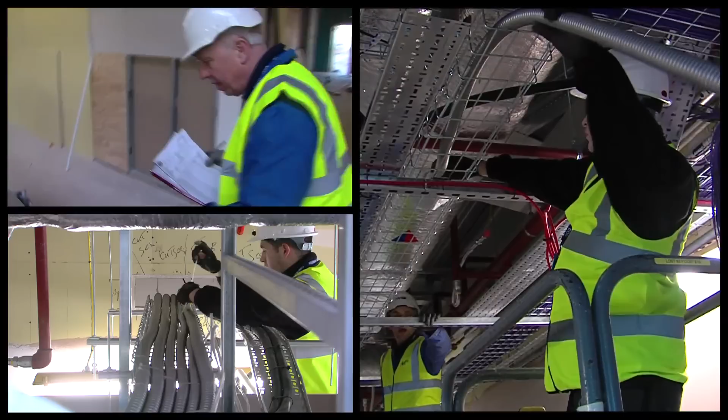All the systems that AWS are able to provide are from an off-the-shelf portfolio of existing technologies and products that have been applied in a way that's both innovative and cost-effective, but, best of all, easy to install.

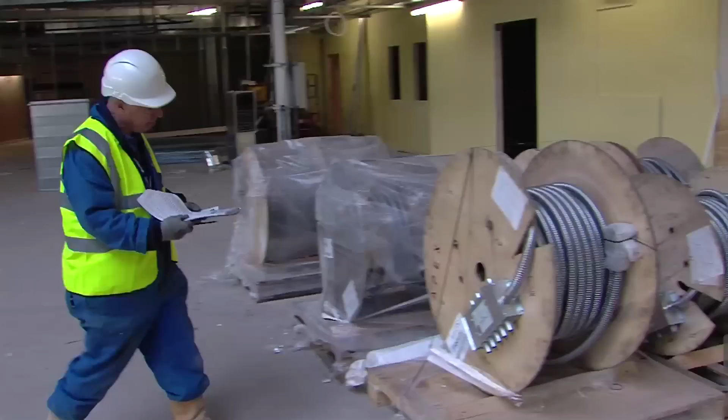It is good practice to manage a modular wiring install by program stage within individual zones. This ensures that all first fix materials are received on site together. Then second and third fix items should be delivered later, in line with the program.

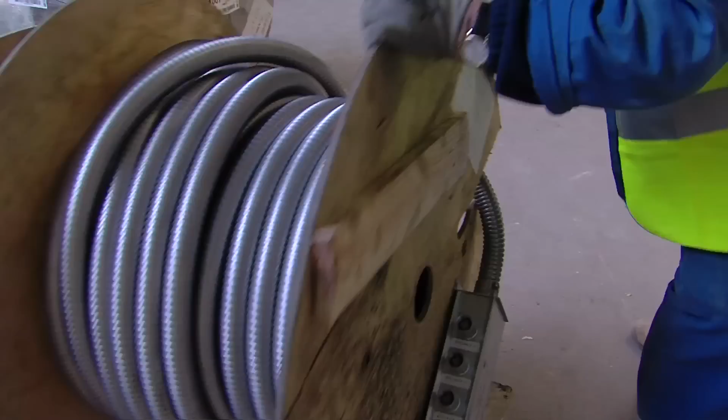Apex Wiring Solutions have standard lead times for standard products which are available on request. As some items are made to order, allowing for these lead times when requesting or ordering material will ensure the materials for the site are delivered on time.

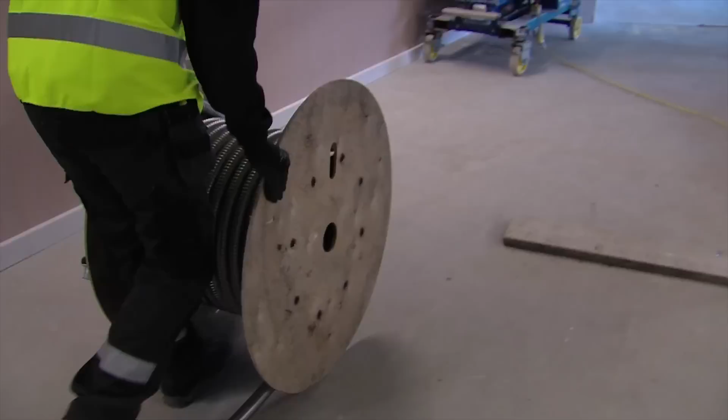All equipment should be inspected for any damage caused during shipping on arrival to site. It should also be checked against any installation schematics, which will define how the system plugs together. Good housekeeping is essential. Deliveries per zone should be segregated and delivered to the required location on site to stop materials from being mixed up.

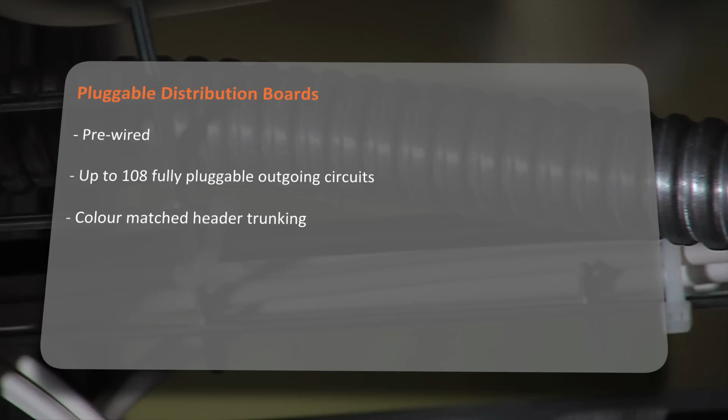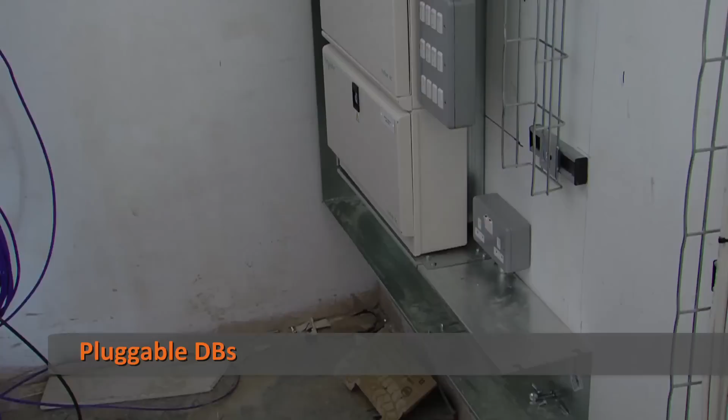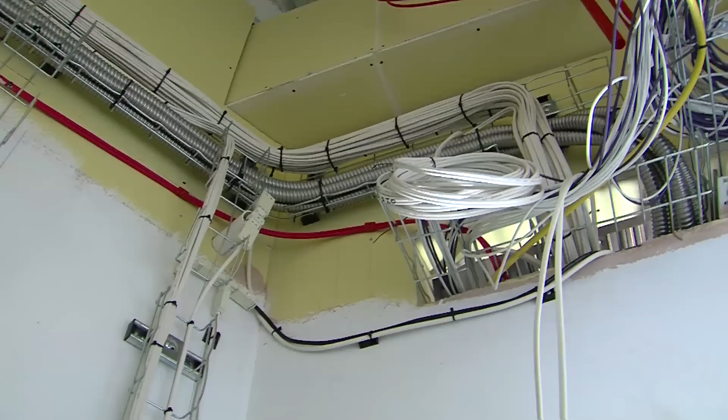A comprehensive range of pre-wired three-phase distribution boards, or DBs, are available. Each DB arrives on site with a set of female connectors wired into a header trunking mounted to the top of the DB, giving the pluggable outgoing circuits. Individual connectors are labeled and mechanically coded to prevent mismating of circuits.

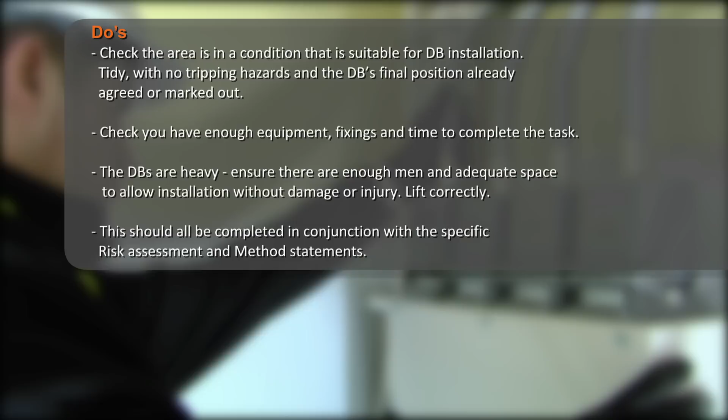DBs are supplied pre-mounted onto a unistrut frame as standard. This allows for simple installation in enclosed environments. Do's. Check the area is in a condition that is suitable for DB installation, tidy with no tripping hazards, and the DB's final position already agreed or marked out.

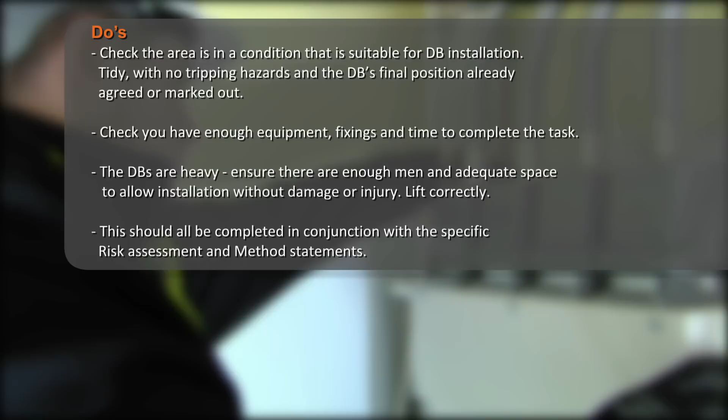Check you have enough equipment, fixings, and time to complete the task. The DBs are heavy. Ensure there are enough men and adequate space to allow installation without damage or injury. Lift correctly. This should all be completed in conjunction with the specific risk assessment and method statements.

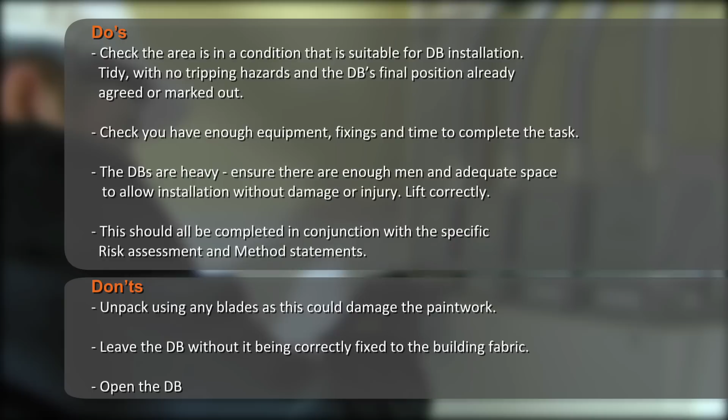Don'ts. Unpack using any blades, as this could damage the paintwork. Leave the DB without it being correctly fixed to the building fabric. Open the DB.

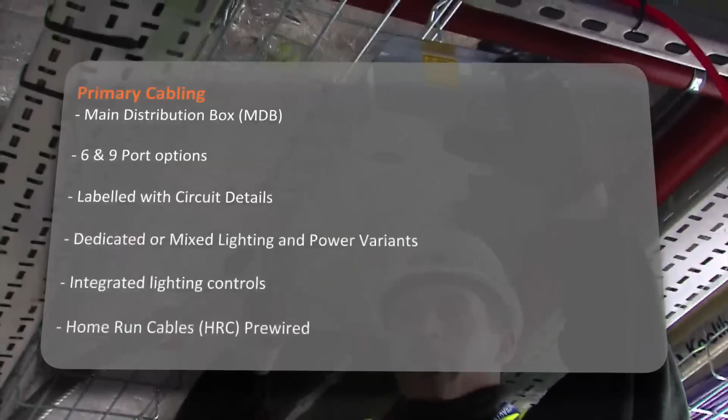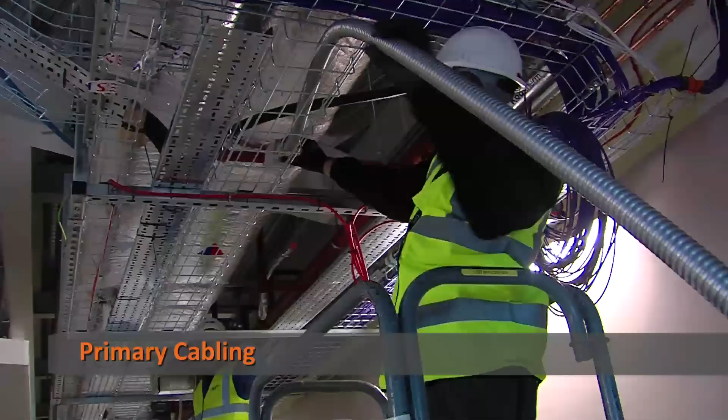Multi-circuit armoured cables, designated home run cables, run from the electrical distribution board to the main distribution box, or MDB. With up to 9 outgoing ports, the MDB can be configured to suit any mix of lighting and power circuit requirements.

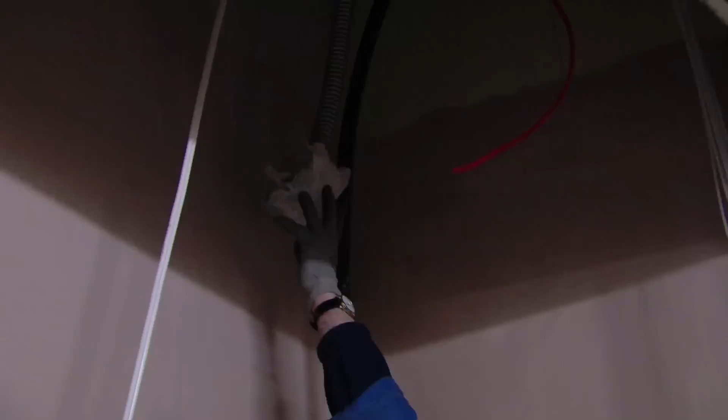Starting in the corridor with the MDB adjacent to the selected containment, decant enough of the home run from the male connector end to feed back through to the DB cupboard. As the DB is the fixed point in the installation, it is essential that this process is well coordinated.

Do's. Take some time to plan the order in which home runs are fed into the DB. Avoid as much as possible crossovers left to right and front to back. Check with the labelled MDB reference numbers and the DB chart or electrical drawing to ensure the correct home run is being used.

Dress the connector end from the top of the DB up the wall using a section of containment and metal tie wraps. Consider the bending radius when installing. Don'ts. Pull the home run using the connector or MDB.

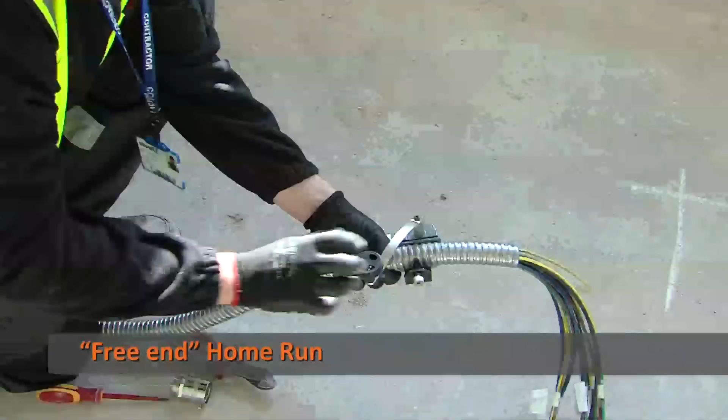Where MDBs are supplied with free-end home run cables, individual circuits are identified by means of core identification, whereby each set of live, earth and neutral insulated conductors are marked on the insulation accordingly, 1 to 6 for a 6-port MDB and 1 to 9 for a 9-port.

Do's. Remove the excess armour using a roto cutter in small sections, removing carefully so not to damage the conductors until the correct strip back is achieved. Take your time. Replacing an MDB is time-consuming if too much armouring is removed or the conductors are damaged. Don'ts. Remove any labelling on the conductors while trimming back the home run.

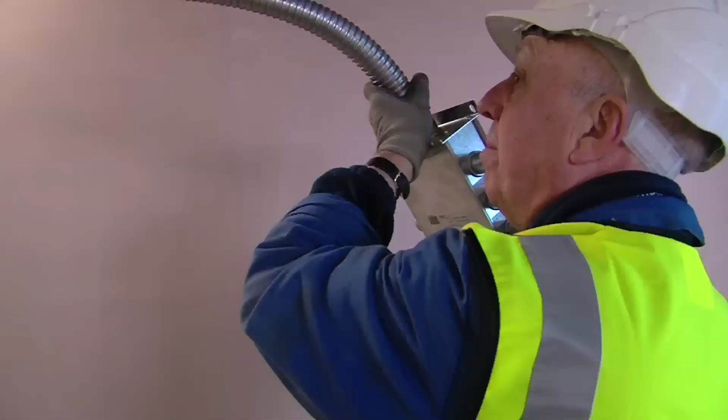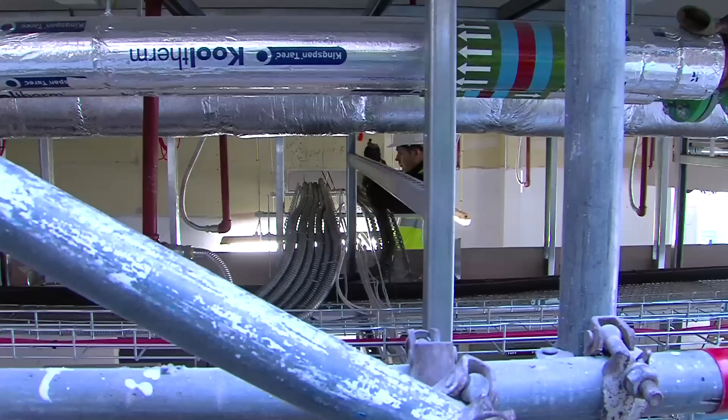Unroll the home run away from the DB using cable jacks, and if site space and working conditions allow, completely decant onto the floor. Then lift into the containment supplied, ensuring the MDB and home run is supported to reduce any strain. The home run should be cable tied every 2 meters to ensure there is no disruption by other services after installation. If the home run is to be clipped to the soffit or floor slab, there are a number of industry standard fixings such as hangers, cleats that can be used.

Do's. Plan the containment with the modular installation in mind, both on size and type. Open-sided cable containment works best. Check the fixings used are suitable for the method of installation. If the home run is suspended, then stainless steel or metal cable ties must be used. Requirements for fire regulations may also dictate the need for metal cable ties. Make the installation as neat as possible. Keep away from other services. Don'ts. Leave large sections hanging unsupported, as this will give undue stress on the armouring and cause it to pop.

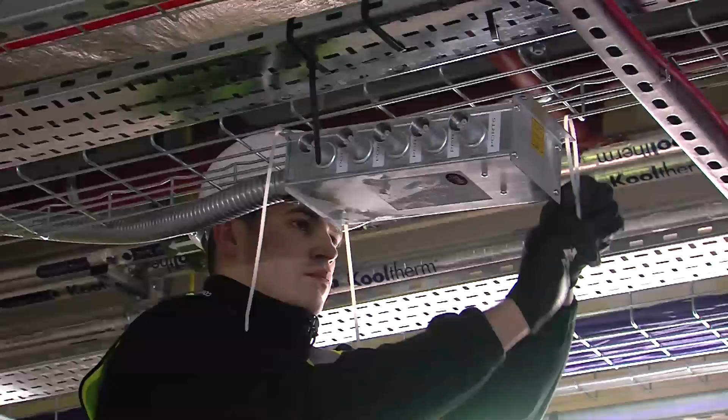The suggested method of installation of the head section of the MDB is to fix the head under the basket containment. This allows for an easier access and tidier installation of the lead assemblies away from the MDB. First, secure the MDB head with plastic cable ties to achieve a safe and sound fix, then repeat with metal cable ties to cover a number of potential safety concerns. Where specification dictates, other containment fittings can be utilized in conjunction with the 4 MDB fixing holes.

Do's. Mount with the labeling showing. Use drum jacks if available. Don'ts. Pull the MDB by holding only the head. Leave the MDB head hanging unsupported. Twist the MDB head round more than 180 degrees.

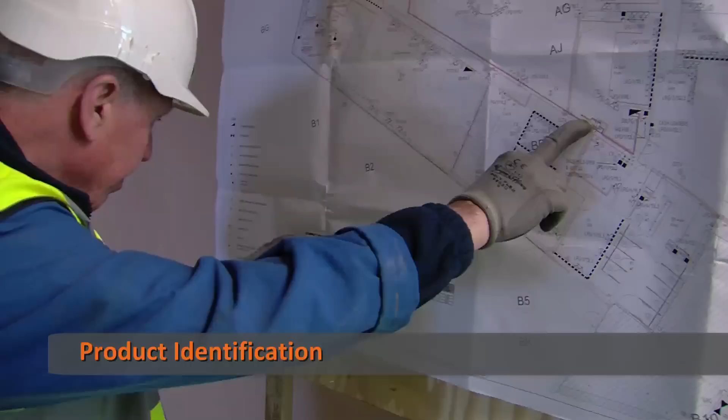Correct identification of the product is essential and can be derived from the electrical drawing by cross-referencing with the schematic. The item part number is shown on the schematic, and this allows the correct assembly to be easily selected. The product labeling details length, conductor size and number of conductors, as well as a part number for reordering and as a cross-reference back to the schematic. A few rules of thumb are built into the modular system.

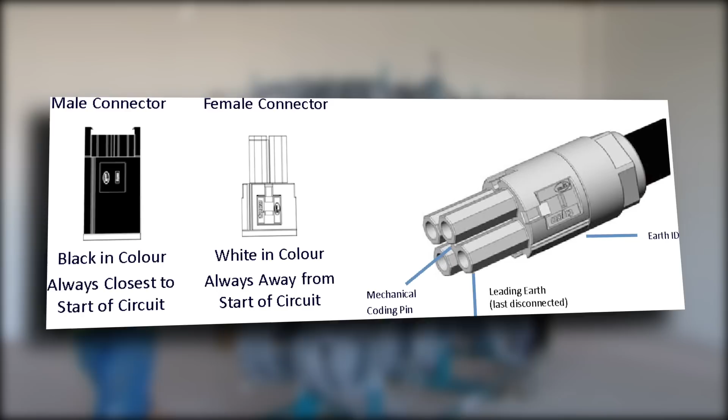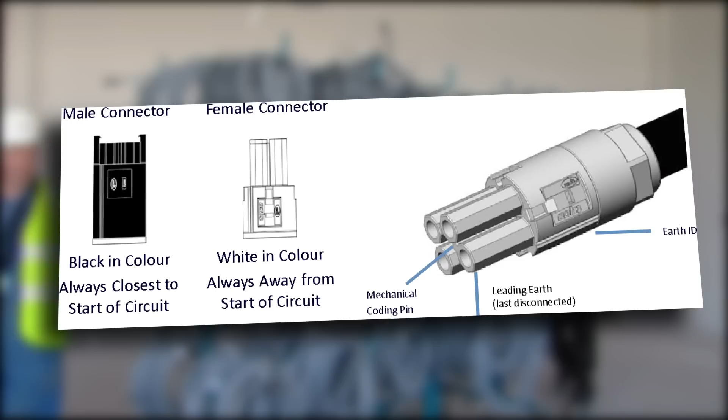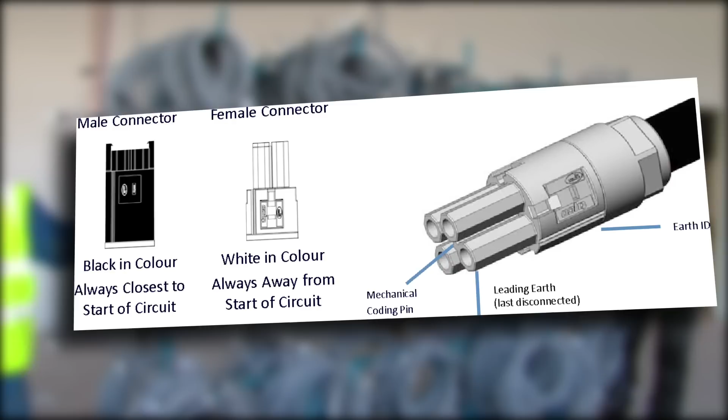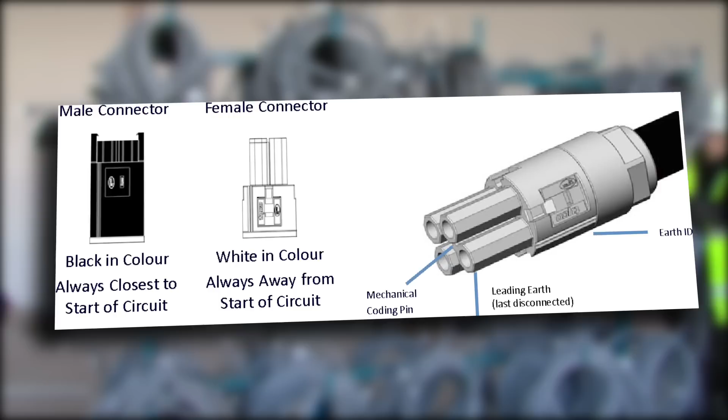1. The connector color denotes the cable gender. For example, the black connector is the plug or male connector, the connector closest in the circuit to the DB, and the white connector is the socket or female connector. 2. The connector lock nut denotes the number of pluggable ways. For example, a white lock nut designates the assembly is for use in a 3-core system, while a black lock nut signals a 4-core system. 3. Therefore, the system is designed for a black connector to plug into a white connector, and only connectors with the same color lock nut connect together.

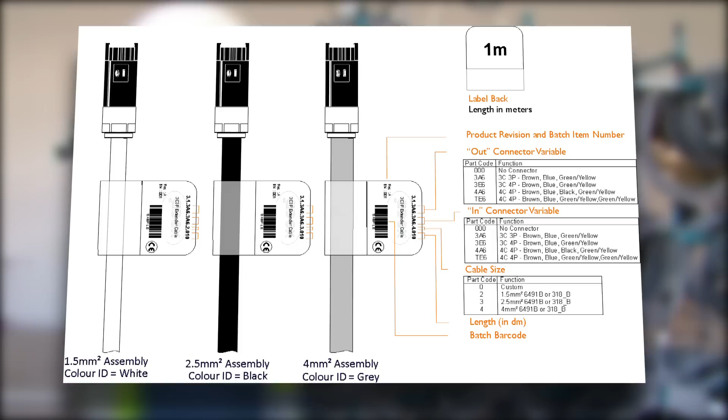4. The cable sheath color quickly identifies the conductor size. For example, a white outer sheath denotes 1.5 square millimeters, a black outer sheath is 2.5 square millimeters, and a grey outer sheath is used for 4 square millimeters assemblies. Do's. Always use the schematic. The length is shown on the label. Don'ts. Guess the product. It's always more difficult to replace a lead than double-check first. If there is any doubt, simply refer to the product label and the schematic for fit, form, and function.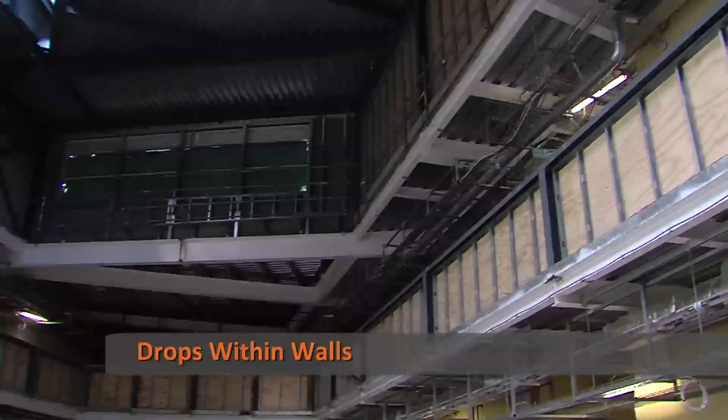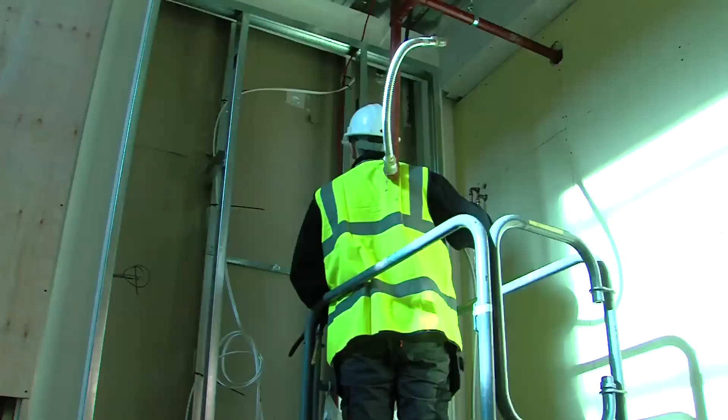Each building program is unique, but in most cases, after the corridors or streets are completed, the first side of the boarded wall is constructed. This is the ideal time to install wall drops. The construction drawings must show correct information relative to the different mounting heights, and these must be considered when allowing the length of all wall drops. At high level, feed the cable assembly through a drilled hole. Keeping this hole as small as possible, 25 to 30 millimeters, ensures that fire stopping isn't an issue when performed. If the number of cables or site conditions require clipping, then clip sparingly along the length of the drop within the wall. At the socket or accessory position, feed enough cable to connect the pluggable assembly.

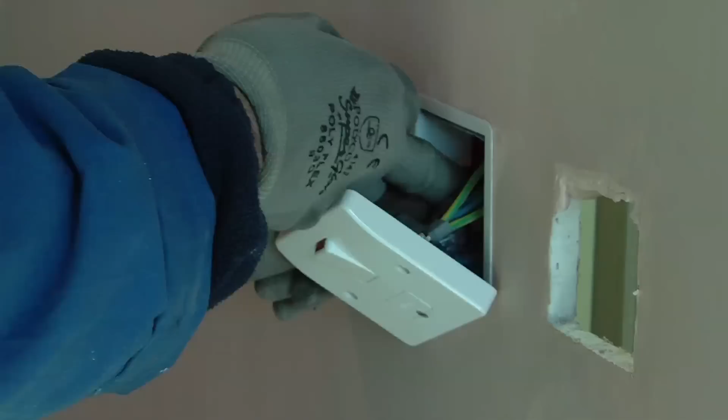Installing the accessory and backbox is a simple process. Firstly, connect all the cables required for the application. Then present the backbox through the hole in the plasterboard and deploy the side wings to hold the unit in place. To ensure that the cables are suspended within the safety zone, pull the slack cable through the wall at the top and clip on the outside of the board.

Do's. Use the schematic to understand what cables are required and why. Ensure the wall drop stays within the safety zone as outlined in the latest IEE standards BS 7671. Allow enough cable at the bottom of the assembly so that it can be retrieved when the second side board is fitted and notched. Don'ts. Overclip an LSOH or unprotected wall drop. It should be allowed to move to the side if someone tries to puncture it through the wall. Never bend any assembly within 150 millimeters of the connector. Never exceed the bending radius of any cable.

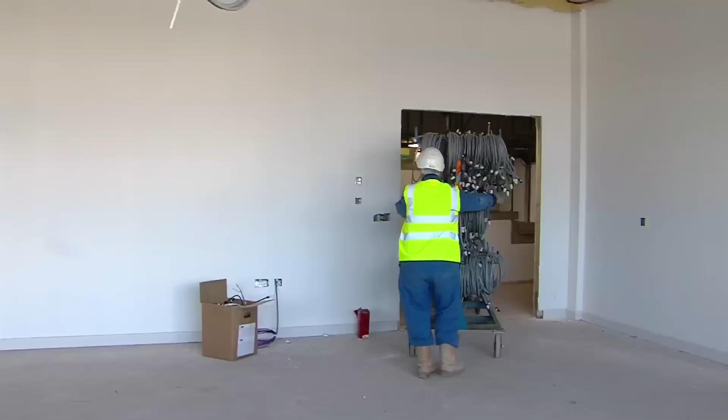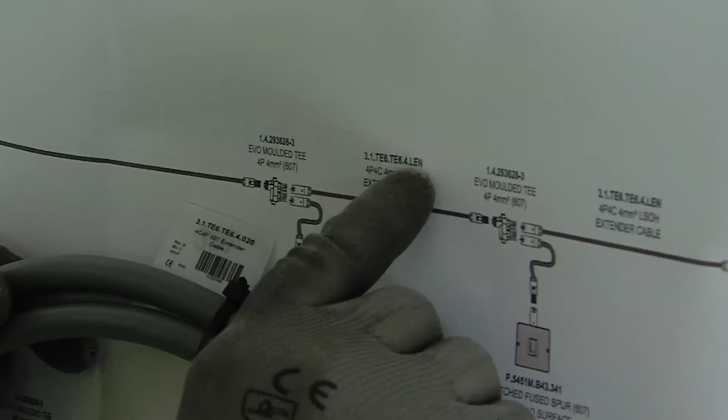The lead assemblies that are plugged into the MDB and run between all other modular equipment are called extenders. These assemblies are sent to site on purpose-built trolleys, which aid their movement around site in a safe manner, keeping the workplace tidy and offering a form of protection for the product. Product identification is as previously described, and referring to the product labeling and schematic will ensure the correct product for the task is selected.

These extenders can be routed around the building in a number of different ways. For example, in basket containment, clipped to the wall, clipped to the soffit, or cable tied to the catenary wires for the ceiling grid. If clipped on a wall, it is recommended to use P-clips situated 150 millimeters from every connector and every 300 to 400 millimeters along the lead length. Secondary leads, up to 4 cables of the same type, can be tie-wrapped to a lead fixed in this manner.

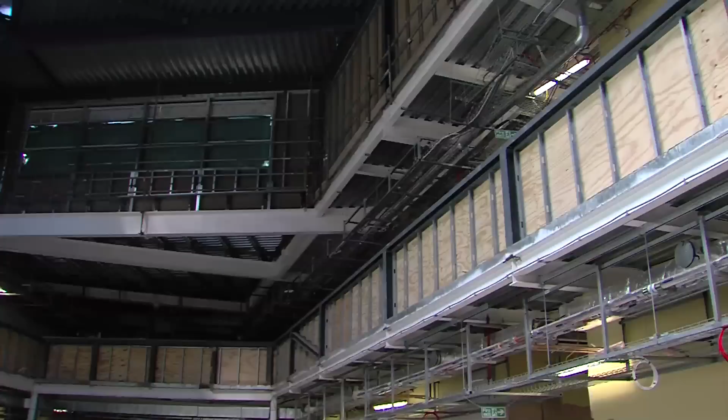If clipped to the soffit, then use P-clips 150 millimeters from every connector and every 300 millimeters along the length. Secondary leads should not be tie-wrapped to these cables. Any excess cable should be looped into a single helix, ensuring compliance with bending radiuses. Removal of the connector allows for virtually any secondary device to be hardwired into the system, including fans, PIRs, luminaires, etc. This can be performed either on-site or off-site, making a fully pluggable wiring installation possible.

Do's. Keep power, lighting and data quite separate. Don'ts. If the wiring system is armored, no other services can be clipped to the COPEX. The Apex range of cable assemblies includes an armored range, which would be a direct replacement for rigid metal conduit and pulling of cables in areas where a high level of mechanical protection is required in the building specification. With a special gland coupler, connections can be made simply and quickly, giving a truly fully armored, mechanically protected system.

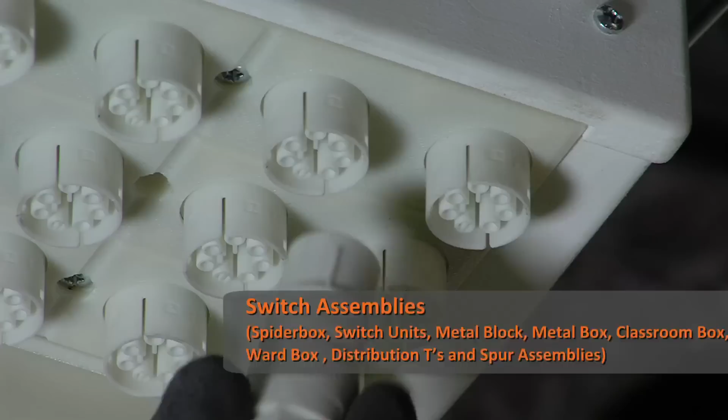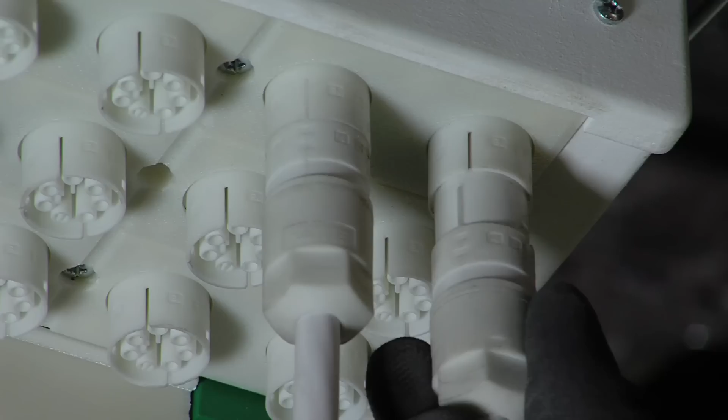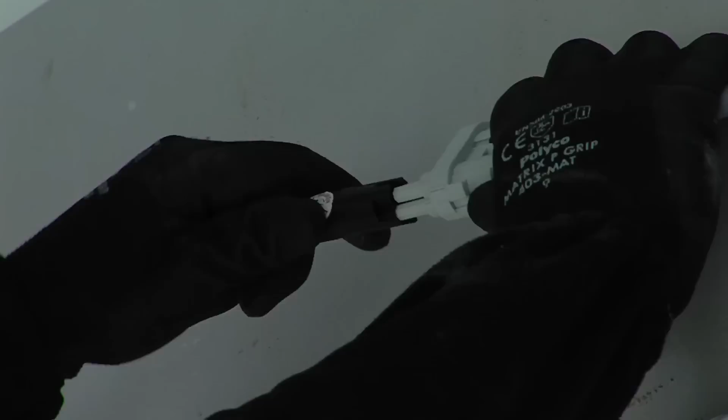Switch blocks are pre-wired compact boxes configured to suit all types of hard switching, available in both armored and unarmored versions, and allowing switching to be achieved without complicated on-site wiring. All switch units are mechanically and color-coded to aid component identification and to prevent miswiring on-site. Each switch unit is supplied with a label detailing each input and output on the device, aiding installation. Lighting switch boxes can be designed for specific applications upon request, including a lighting distribution box available in 4, 8 and 12-way versions for elegant circuit delivery within a room, with a solution that is simply plug and play.

T's are a form of power distribution, allowing a circuit to branch in 2 directions. Spurs are usually a pluggable fused connection unit that allows for local isolation of the circuit for maintenance or repair. For example, power for a CCTV camera or door lock.

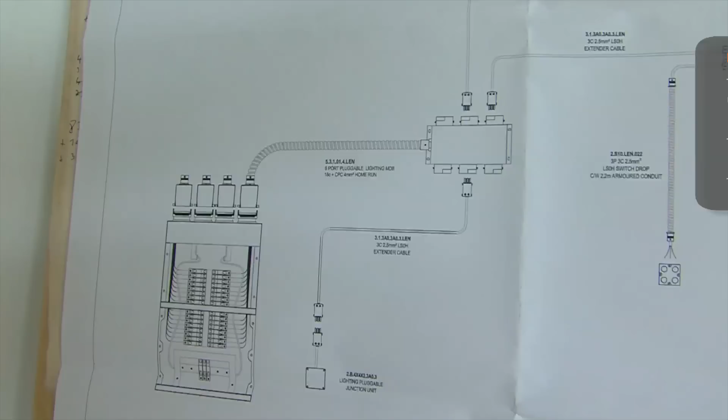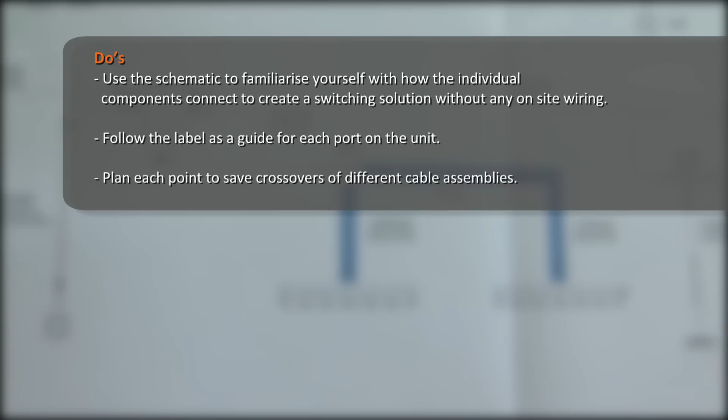Do's. Use the schematic to familiarize yourself with how the individual components connect to create a switching solution without any on-site wiring. Follow the label as a guide for each port on the unit. Plan each point to save crossovers of different cable assemblies. Don'ts. Carry any assembly by the cables or connectors. Leave the device hanging loose on one lead assembly, as this can damage the lead.

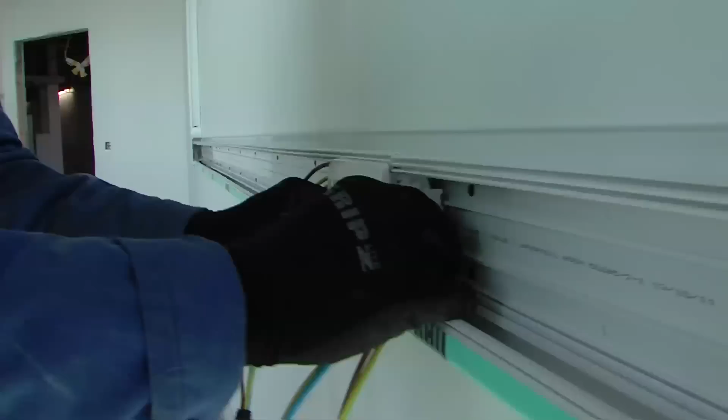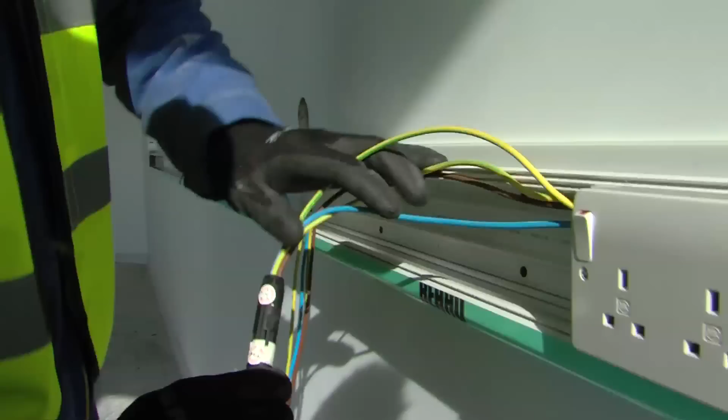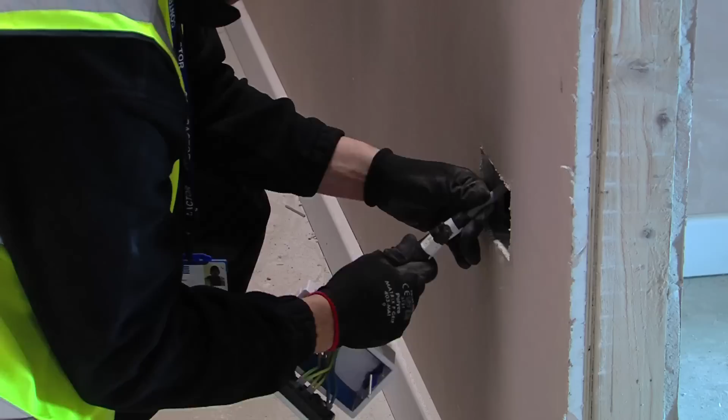Dado-mounted wiring accessories are available, specifically designed for this application, and come supplied with extra long flying leads to allow for the input and output connections to be moved from left to right, so that the circuit connection can be made from either side of the dado-mounted wiring accessory. A wide range of pluggable wiring accessories are available in applications up to 6-pole. Almost any accessory for any application by any manufacturer can be made pluggable at the Apex factory. These are available in almost any backbox configuration and can include intumescent pads and acoustic insulation as options.

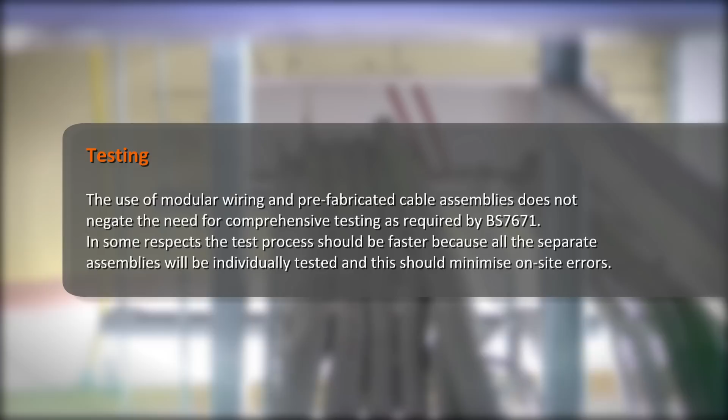The use of modular wiring and prefabricated cable assemblies does not negate the need for comprehensive testing as required by BS 7671. In some respects, the test process should be faster because all the separate assemblies will be individually tested, and this should minimize on-site errors.